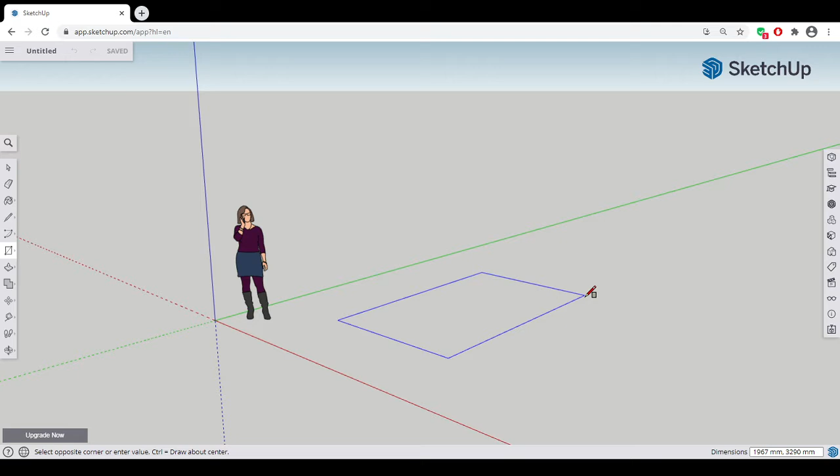First of all, I'm going to dive straight in, get a rectangle, and draw a rectangle on the floor. It's going to be quite big. Before I click away, I'm going to put in the dimensions, which is 120. Remember, this is millimeters, so we have to make it 1200, 1800. Okay, that's a shed.

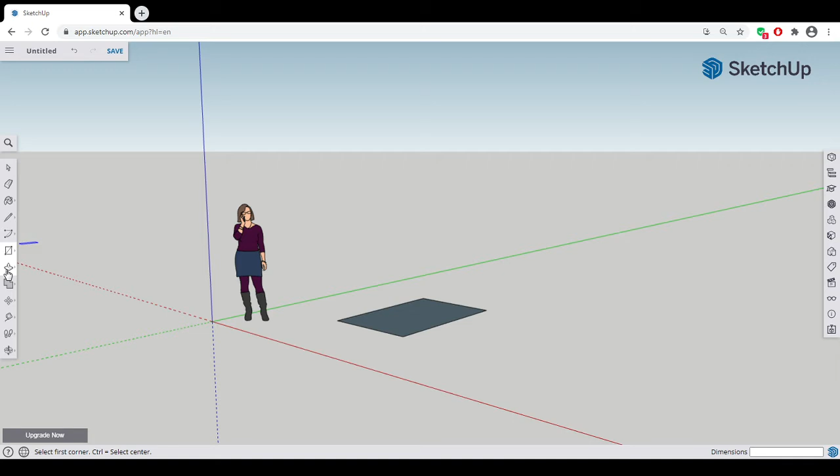Also, what I'm going to do now is use the push-pull, which is an extrude option. Extrude means to create material or push material up. We're going to go up to 2000 - sorry, no, not 2000, but 2200. So it's going to be quite a tall shed, but a narrow one.

Now what I'm going to do is use the pencil tool or the line tool, and I'm going to go along that center line at the top and draw a straight line down, and that's a center line. That's really important to help me sort things out afterwards.

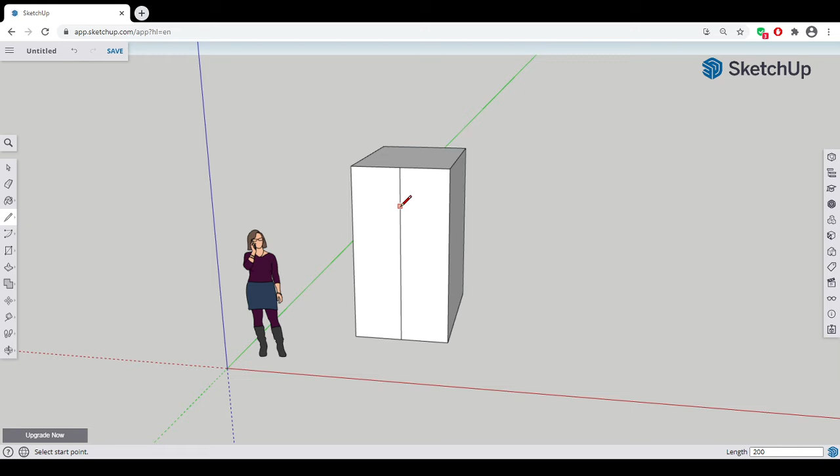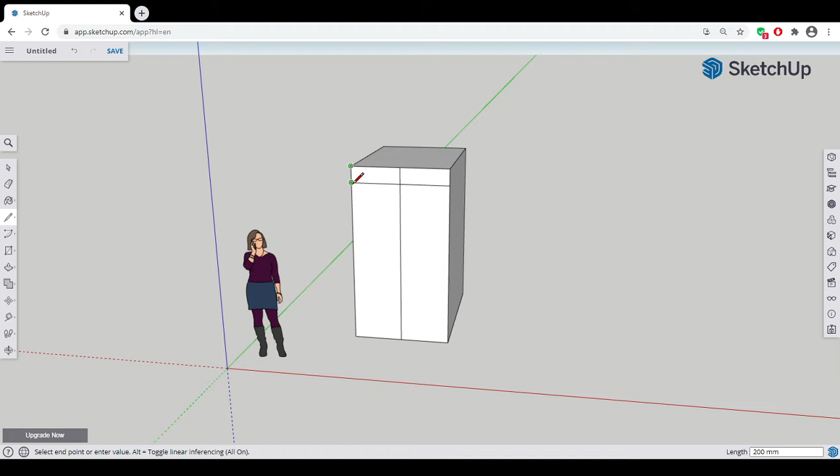What I'm now going to do is go down that center line 200. What happens is I've made a little end point here, or I should have made an end point along here. Let's just try that again. 200, and that should have made a little end point for me. So if I draw my pencil line along there again, it should find that end point for me - it goes green. You can alternatively also just draw 200 down from there, from the edge, and you might find that a bit easier. Okay, that's done. I'm going to get off this tool, so I'm going to press escape.

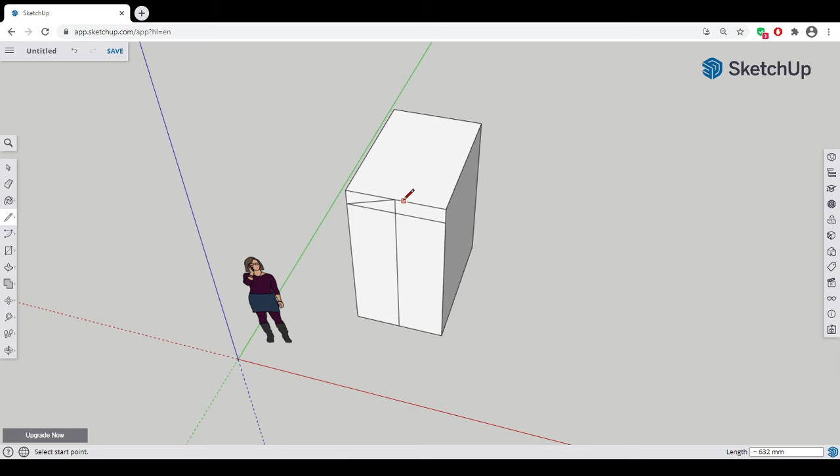So the next thing I want to do is create a bit of a roof here. There's a couple of different ways I could do this, but I'm just going to keep this simple. So I'm actually going to draw a triangle, and it snaps to the points for me. I'm just going to have that as two diagonals in there. Next thing I'm going to do is push pull this back, and there we go - that's our roof.

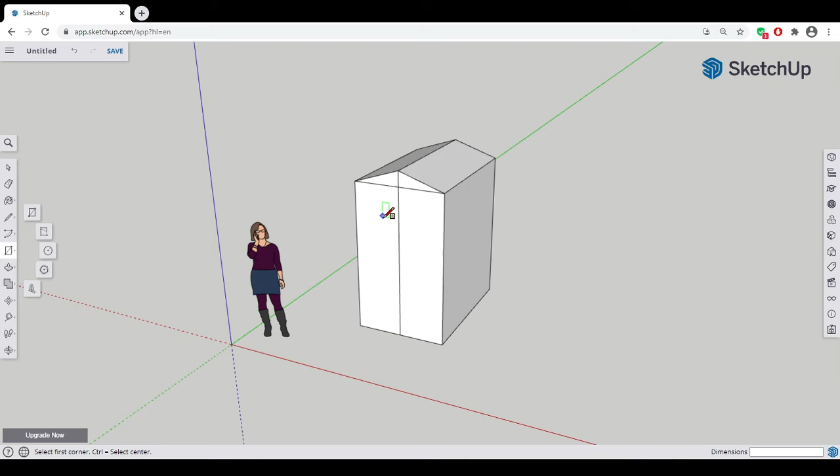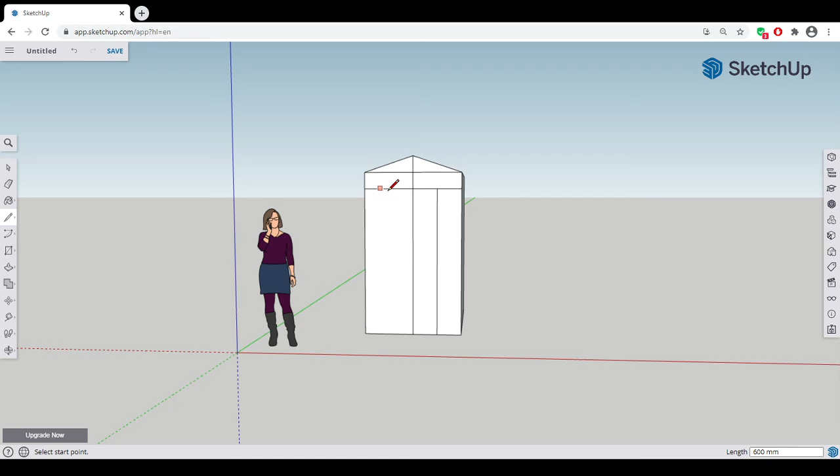The next thing I'm going to do is add a door. To do this, I'm going to make sure, having a look at my avatar here, that this door is tall enough to allow my avatar to go in. So I'm going to draw a line up along the center again of 1800, and you'll see that green point has started again. I'm going to draw along a line there, and draw a line across here, which I think I will make 300. And then the same - I'm going to draw across here, have that line. It's a half point when it goes to midpoint. And this is going to become my door.

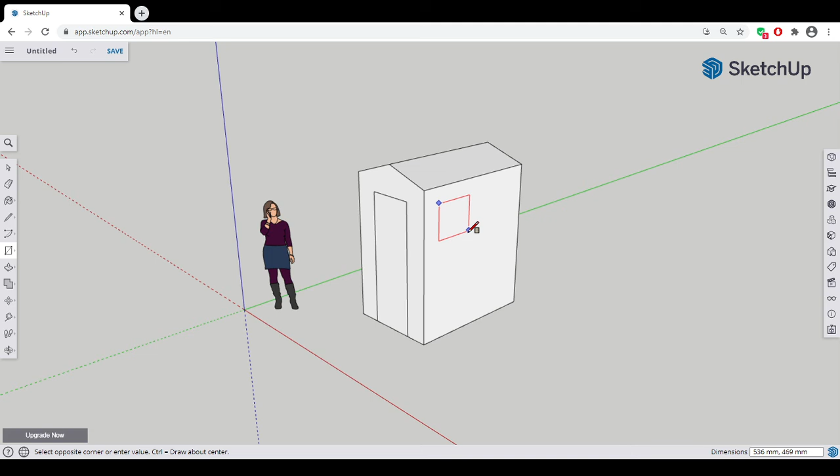I'm going to use the rubber tool to rub out these lines I don't need anymore. There we go. I'm going to put a couple of windows using the rectangle tool. You could place these far more accurately, but I'm just going to place a couple here. You can see SketchUp's great because it makes these sort of inferences for you, so you don't have to. Right, so that's your basic shed.

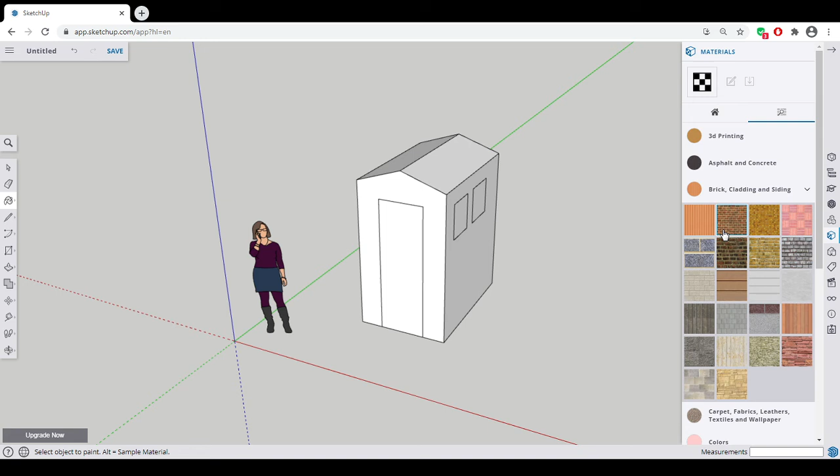Last thing we want to do is add some materials. I click on the paint bucket tool, go over to the actual search tool, which is on the right on my little column menu. Let's take a moment to think about it. What I want to do is find cladding. I think that's the correct one. And there's my shed cladding.

And I think I'll find something - we got something for the roof. I'm going to go to textures. I'm going to use this grayish texture, and that looks a bit like a roof. And then lastly, I'm going to go to glass and mirrors for my windows. And there we go, we've got a couple of glass windows.

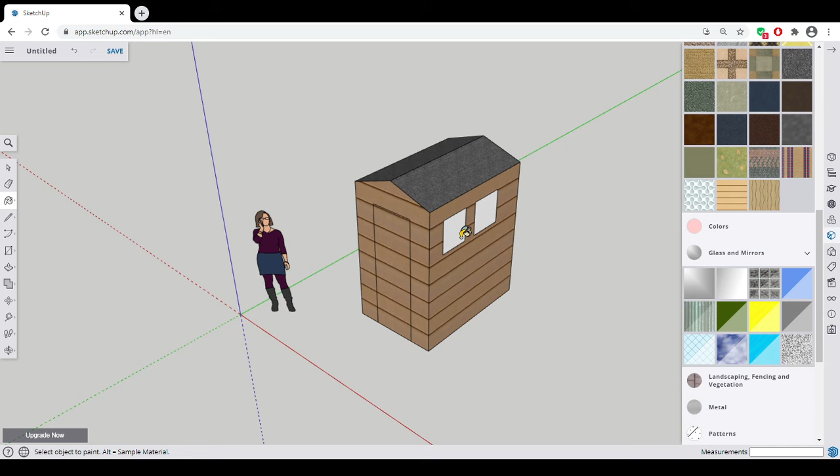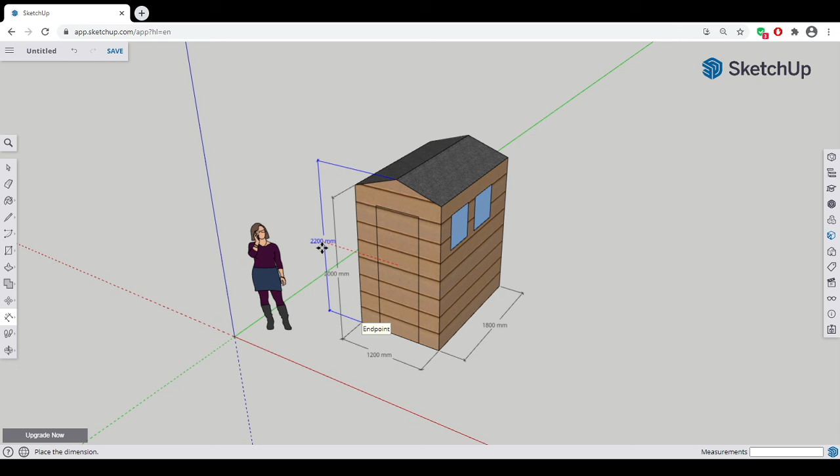Now you could put this any color that you want. You could probably do this in a lot more detail, but I just wanted to show you how to do this very quickly. Once again, the measurements - and I'll put some measurements on this for you - are 1200, 1800, 2 meters, and from center to top it's 2.2 meters or 2200 millimeters. Okay, all right, I hope you found that fun.

And remember, when you are actually drawing something like a square and you want to put measurements on it, before you finish drawing it you have to put in the measurements using the number keys and separate it with a comma.